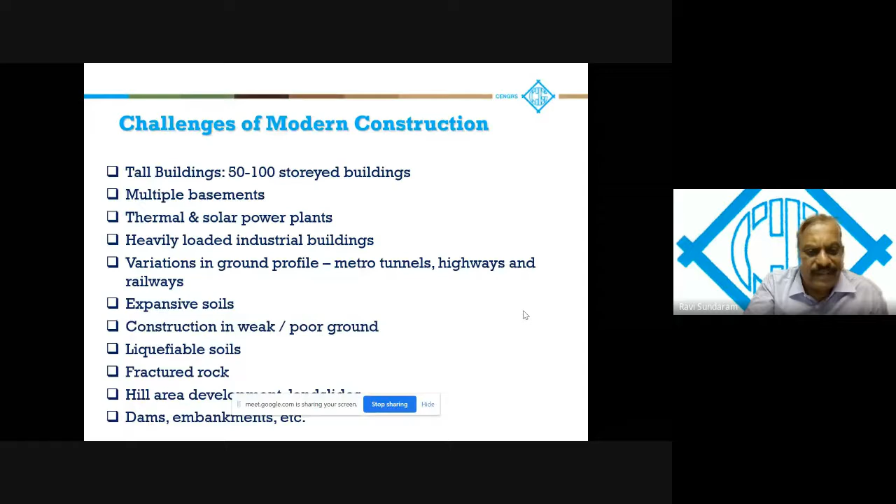The challenges of modern construction include tall buildings, 50 to 100-story buildings, multiple basements, power plants, heavily loaded industrial buildings, variations in ground profile, particularly metros, highways, and railways. When the ground profile is different and the stratigraphy changes along the alignment, the design has to keep changing according to that. Then expansive soils, construction in weak and poor ground, liquefiable soils, fractured rock, hill area development, dams, embankments. The list goes on here also.

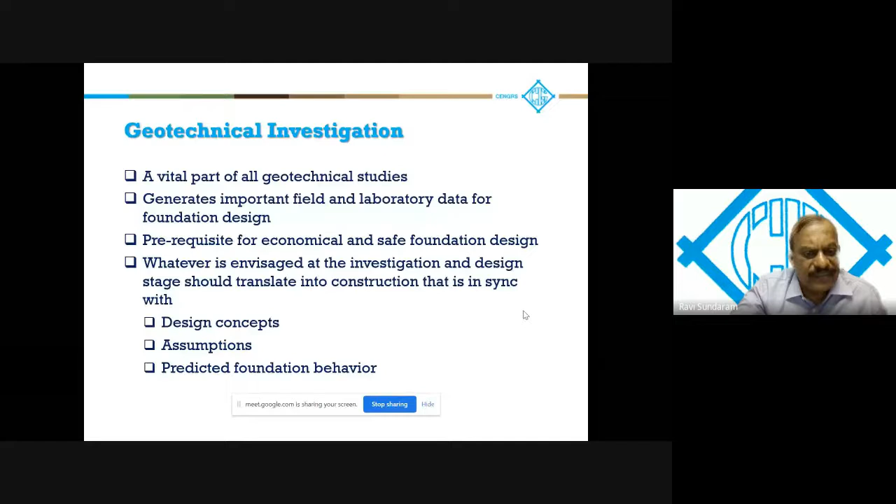So geotechnical investigation, of course, is a vital part of all geotechnical studies. It generates important field and laboratory data for foundation design. It's a prerequisite for economical and safe foundation design. Whatever is envisaged at the investigation stage and the design stage has to translate into construction that is in sync with the design concepts, the assumptions, and the predicted foundation behavior.

Engineers have to come up with solutions for complex problems within a minimum time. So the fast track projects, there is a real challenge nowadays. You have to respond quickly to keep pace with the demands of the fast track projects. Design parameters have to be more realistic. With conventional approaches, it's not just enough to be conservative. You have to go for innovation, safety, and economy. These have to go hand in hand.

So therefore, research and development should address non-quantifiable factors and beyond the textbook situations. The field experience of the engineer becomes most important. You have to understand the assumptions and the limitations of theoretical analysis and computer programs based on theoretical concepts. Computer programs, softwares are being used quite a lot, but the limitations and assumptions have to be clearly understood. The engineering solution which you develop has to be reliable, economic, practical, and amenable to speedy construction. All this within the minimum period. The performance of the structure has to be as was envisaged.

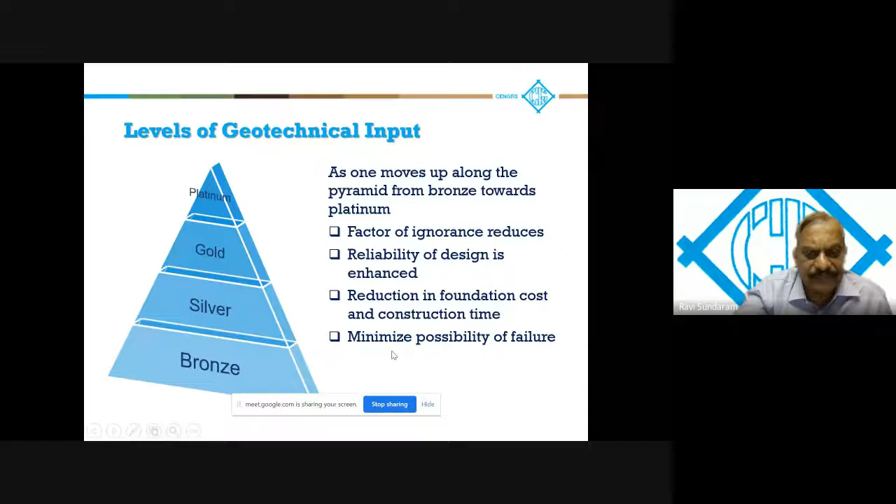So this is called the geotechnical pyramid, geotechnical input pyramid. So as you move up along this pyramid from bronze towards platinum, your factor of ignorance reduces, the reliability of the design is enhanced, there's a reduction in foundation cost and construction time, and you minimize the possibility of failure. So let us look at these bronze, silver, gold, and platinum levels of investigation.

A bronze investigation would have probably shallow boreholes, very limited testing, whereas as you move towards the silver, you have deep boreholes to beyond the pile tip. You conduct SPTs and limited laboratory tests. At the gold level, you have more boreholes, more in situ tests like pressure meter maybe, or maybe static cone penetration tests, lab tests for strength and consolidation, etc.

A platinum level would be a more comprehensive investigation with substantial in situ tests in addition to the boreholes. And maybe if piles are required, you could go for static and dynamic pile load tests. The geotechnical engineer in a bronze level would have limited experience, a non-expert, whereas at a platinum level you have an experienced expert. Similarly, design parameters in a bronze level are primarily guessed, whereas in a platinum level they are site-specific.

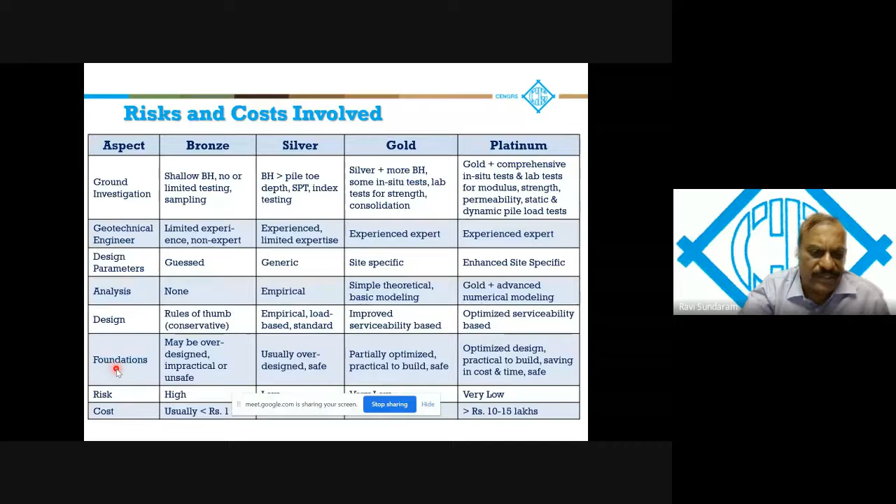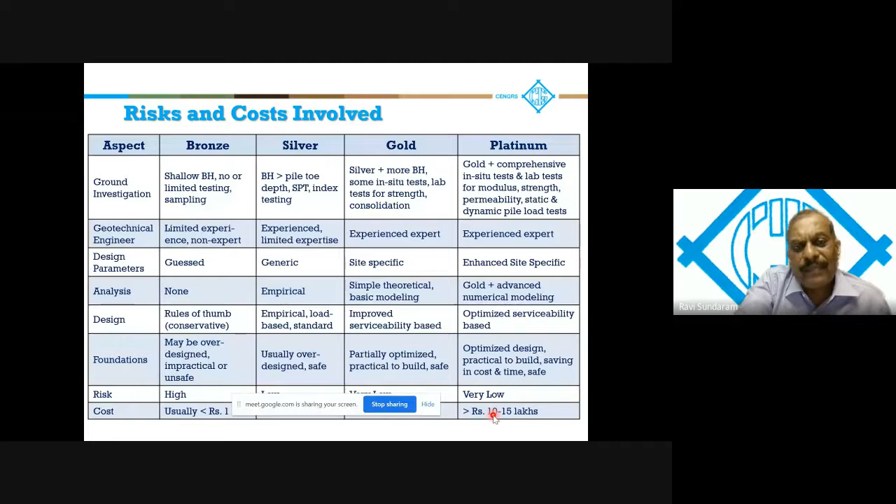The analysis, design, as you move from bronze to platinum, you have an optimized design. The foundations may be over-designed or unsafe or even impractical in a bronze level, whereas in a platinum level, it's an optimized design, practical to build. There is substantial savings in cost and time, and the risks are low in a platinum investigation. Obviously, the cost is much more, but you should always remember that for the amount spent in the investigation, you save much more in the foundation cost.

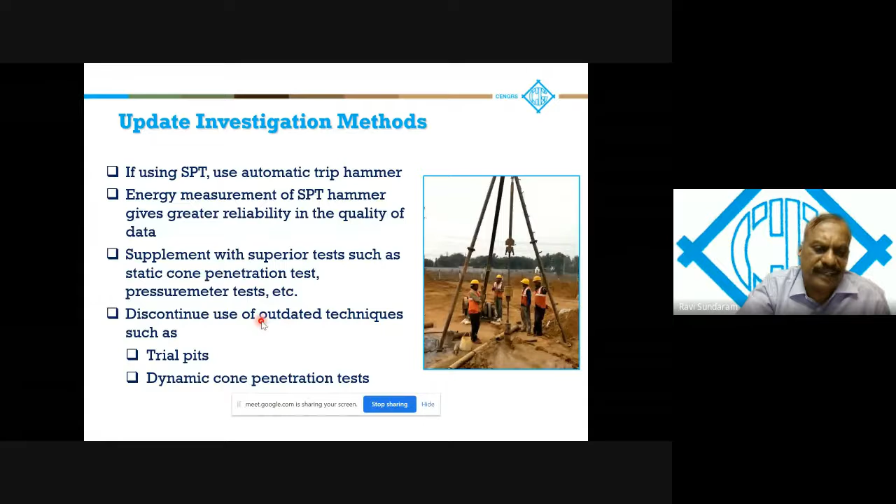So we must move towards gold and platinum levels, avoid bronze level investigations. The investigation should be tailor-made for the project site as per the site requirements. So involvement of the geotechnical consultant should continue right up to the construction stage. So the investigation methods need to be updated. If you are using SPT, you go for an automatic trip hammer. Energy measurement in the SPT hammer gives greater reliability in the data and the quality of the SPT. So you can see the automatic trip hammer here. You have to supplement it with superior tests like static cone penetration tests, pressure meter tests, etc. And discontinue outdated techniques such as trial pits, dynamic cone penetration tests, etc.

Use advanced testing methods. Upgrade to cone penetration test. This would be the static cone penetration test with or without pore water pressure measurement. Pressure meter test, dilatometers, vane shear test, seismic methods, geophysical testing, remote sensing, advanced sampling and laboratory testing methods. So there are various techniques available, but of course we shall be limiting to a few of them only here.

The most important thing is to use field instrumentation data for important structures to update the design parameters. Observational method of design based on field observations and instrumentation. If you can implement this, you can do your design very economically. Use advanced analysis methods; softwares are available for analysis. And modern testing technologies are essential for improving the state of art, the state of practice of geotechnical engineering. So I'd like to differentiate between the state of art and state of practice. In the state of practice, it's what you actually do there.

So static cone penetration test and pressure meter test can justify use of higher bearing capacity for foundations and economize, so as to assess the need for ground improvement. SPT energy measurement can enhance the quality of the data. In some cases, need for pile foundation or ground improvement may be eliminated. Geophysical tests can confirm continuity of the strata, identify anomalous zones if any. Primary and shear wave velocities from seismic tests can be used to assess the shear modulus and Young's modulus. Static cone penetration tests and seismic tests can provide useful data for liquefaction analysis during earthquakes.

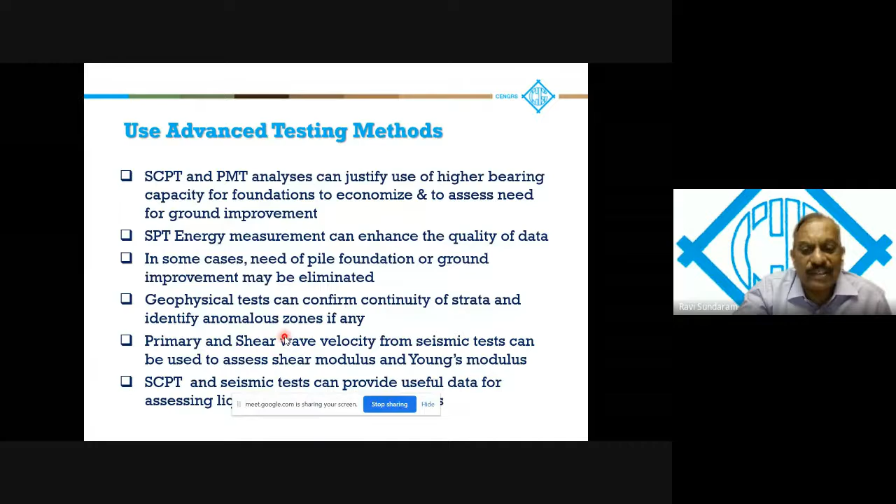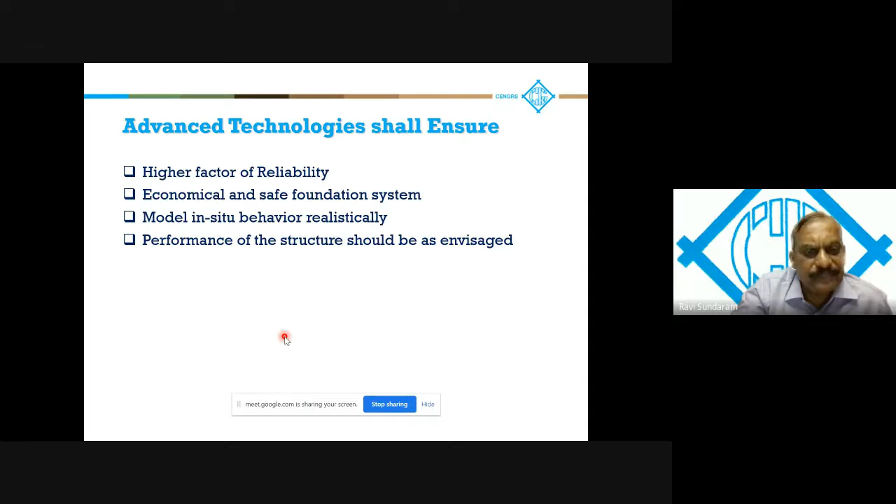So advanced technologies will assure higher factor of reliability as against factor of safety. Economical and safe foundation design. It will model the foundation behavior realistically so that the performance of the structure is as envisaged at the design stage. So thus you can add value to geotechnical exploration and enhance the quality of design.

So tests covered in this webinar series: cone penetration test using mechanical cone as well as using electric cone with pore water pressure measurement, pressure meter test, and SPT energy measurement. Geophysical tests include electrical resistivity test, cross-hole seismic test, seismic refraction test, and spectral analysis of surface waves, that is, SASW test.

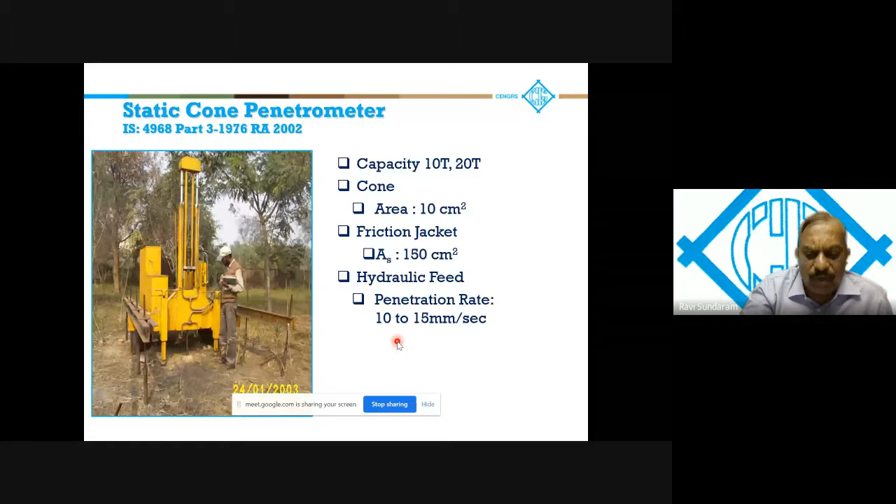So just an introduction to the static cone penetration test, the mechanical cone as well as the electric cone with pore water pressure measurement. The conventional cone penetrometer, which is used in the country, is the mechanical cone system. 10 ton and 20 ton systems are available. The cone usually has a cross-sectional area of 10 square centimeter and a friction jacket of 150 square centimeter. It has a hydraulic feed and the penetration rate is about 10 to 15 mm per second. So this is the mechanical cone. You can have a look at details of the cone. You have the cone here and the friction sleeve here.

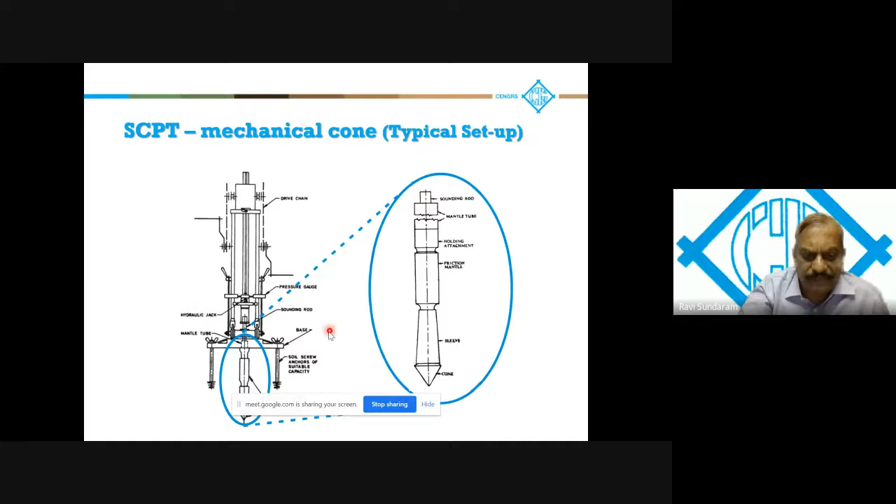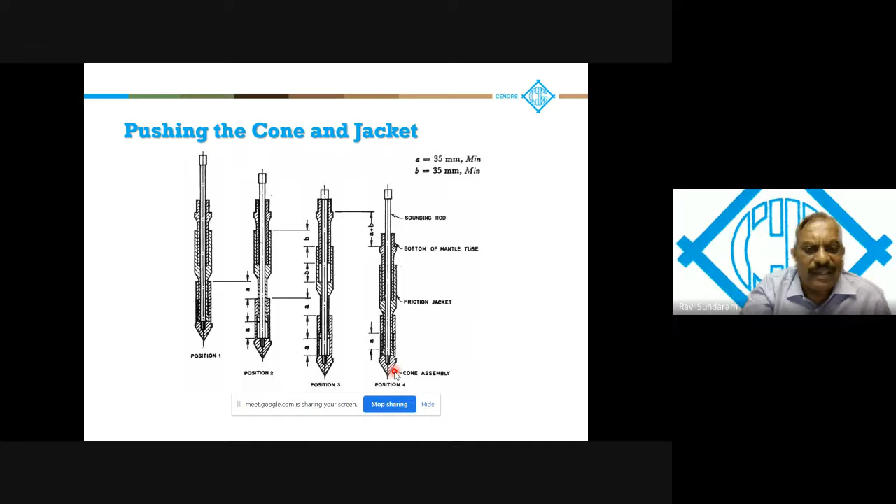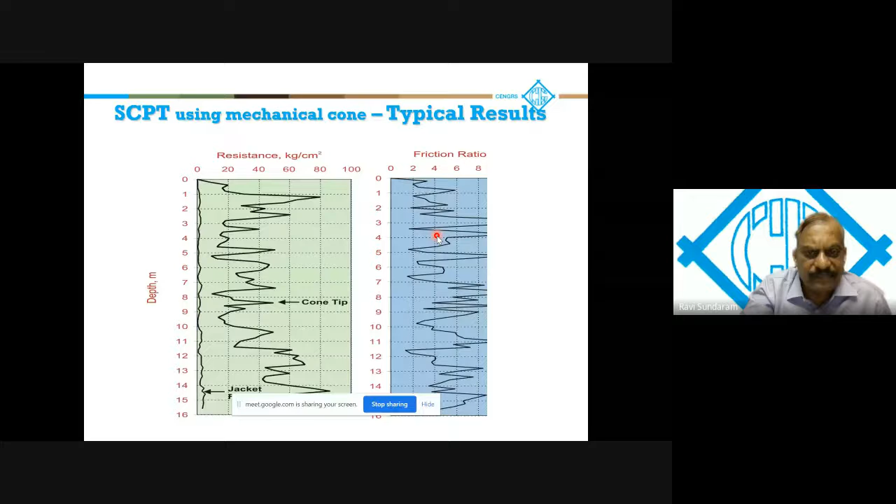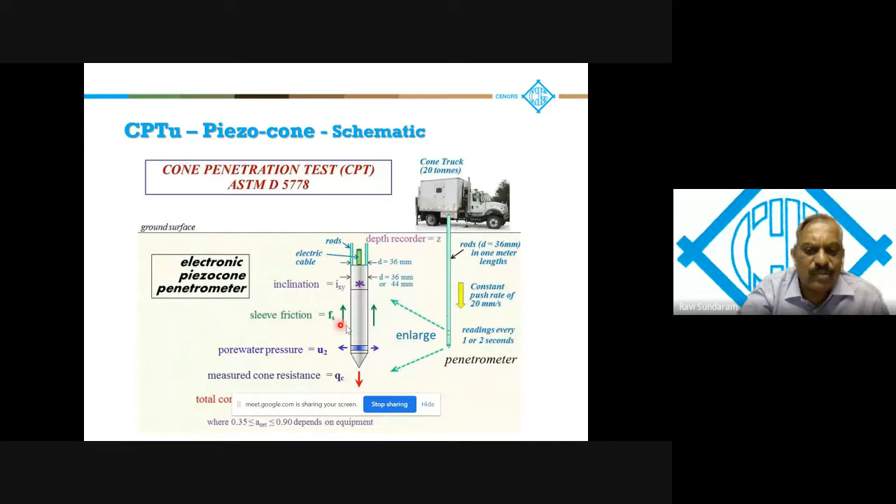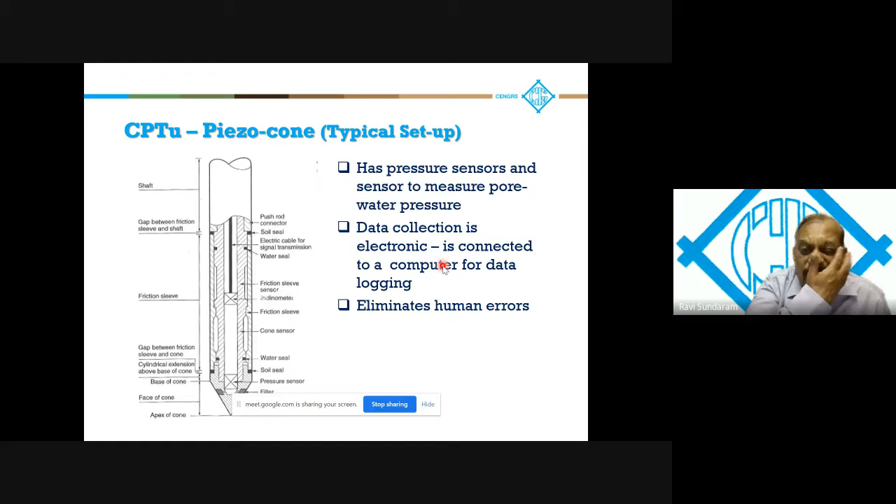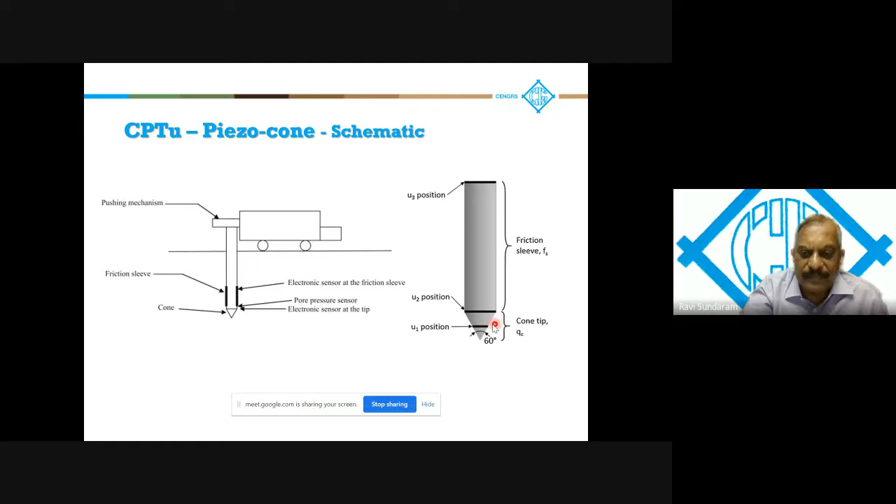So this is a typical piezo cone. You can see here the pressure sensors and the friction sleeve, and at the base of the cone, you have the sensor for the pore water pressure. So the data is collected electronically, connected to a computer. It eliminates human errors. So this is the schematic of the piezo cone. Usually only the U2 is used, although you could have a sensor at this position also.

Cones with a cross-sectional area of 10 square centimeters and 15 square centimeters are both popular. The 15 square centimeter is getting more popular nowadays. The porous element for the pore pressure measurement may be just above the cone or within the cone, as I told you. There is another small variation called the seismic cone with a sensor to measure the shear wave velocity. So that is also being used internationally now.

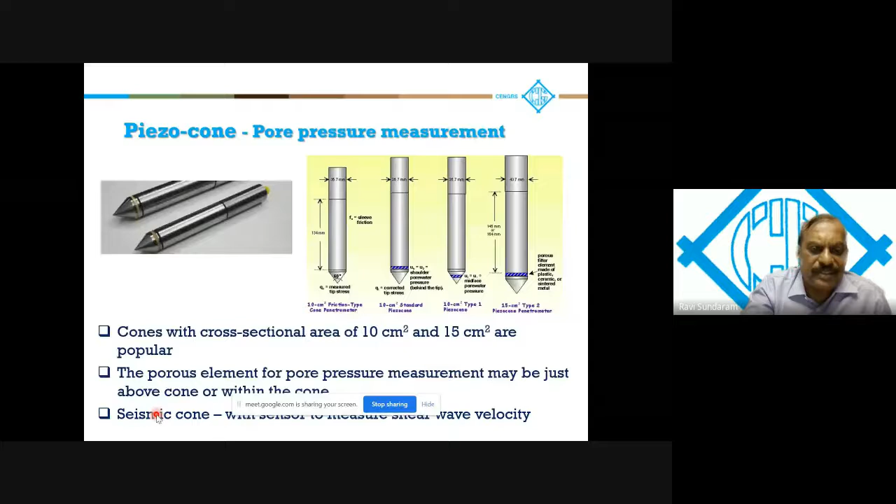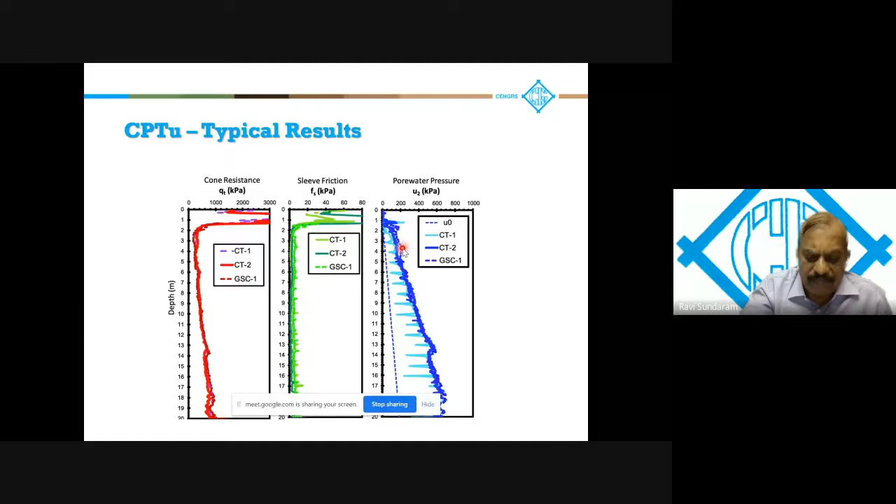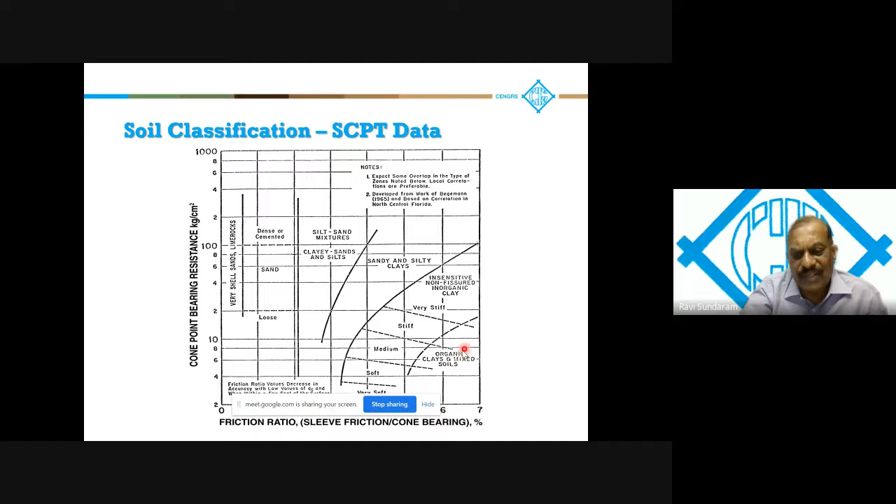Typical results of the cone penetration test: you have the cone resistance, the sleeve friction, and the pore water pressure being measured. So soil classification based on the CPT data, you have the cone tip resistance versus the friction ratio. So the low friction ratios indicate sand, and the higher indicates the clay content. And of course, very high friction ratios would mean it could be organic material.

This is the interpretation of the CPTU data with the cone with pore water pressure measurements. So there you measure u, compute a pore pressure parameter Bq, and this is related to the cone tip resistance, and you can see these different zones. This classification is done, and similarly with the friction ratio.

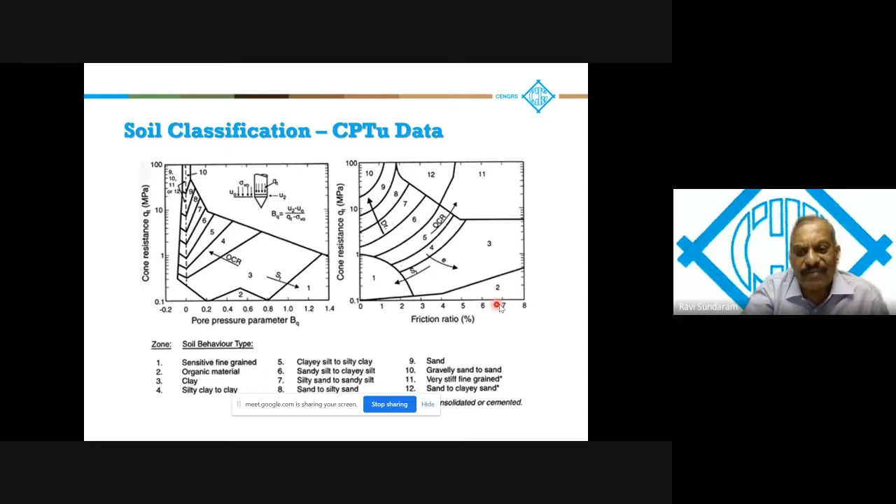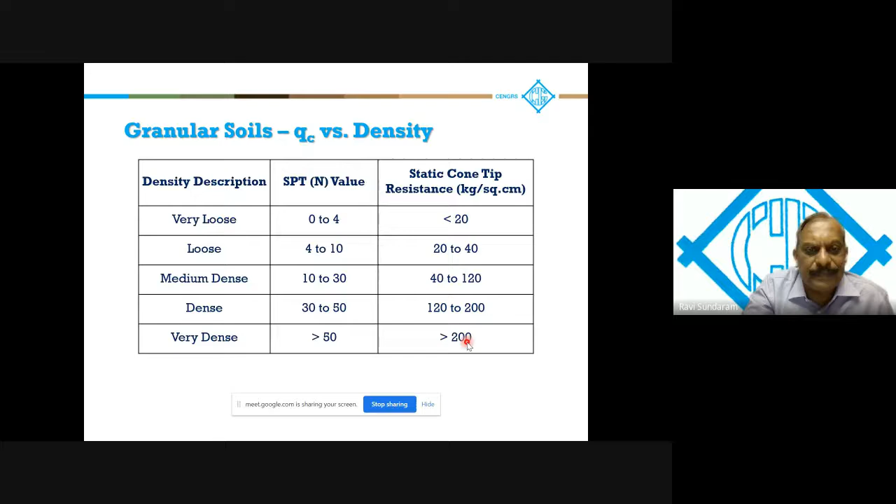Correlations are available for cone tip resistance and SPT values versus density. So right from very loose, with a cone tip resistance of less than 20 kg per square centimeter, to very dense, where you have very high values of cone tip resistance. These correlations are available. And also you can correlate the E values with the qc.

The advantages here are that you get a continuous profile of penetration resistance versus depth, and since it is hydraulically pushed, it eliminates the human errors, and borehole cleaning is not required. And if you were to use CPTU, with the pore water pressure measurements, the advantage is that you get enhanced quality of data and elimination of error due to erroneous interpretation due to friction between the inner and outer rods. All these possible errors are eliminated. It's a simple and reliable electrical measurement with easy recording.

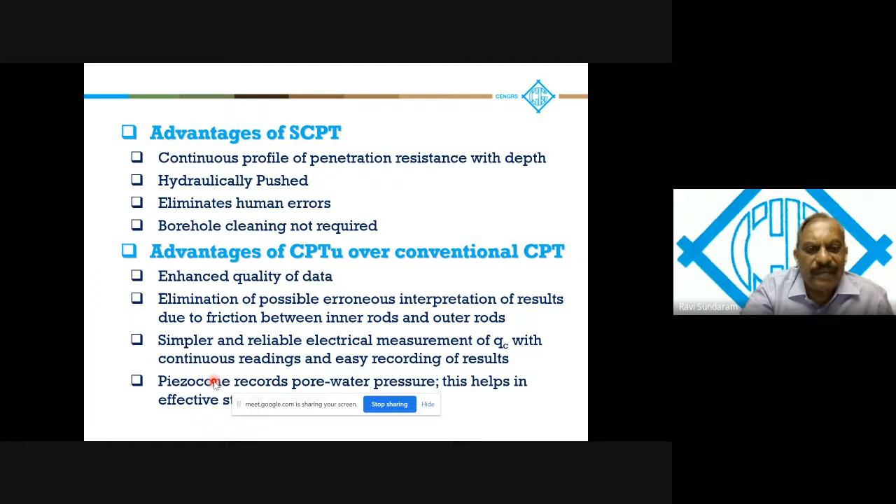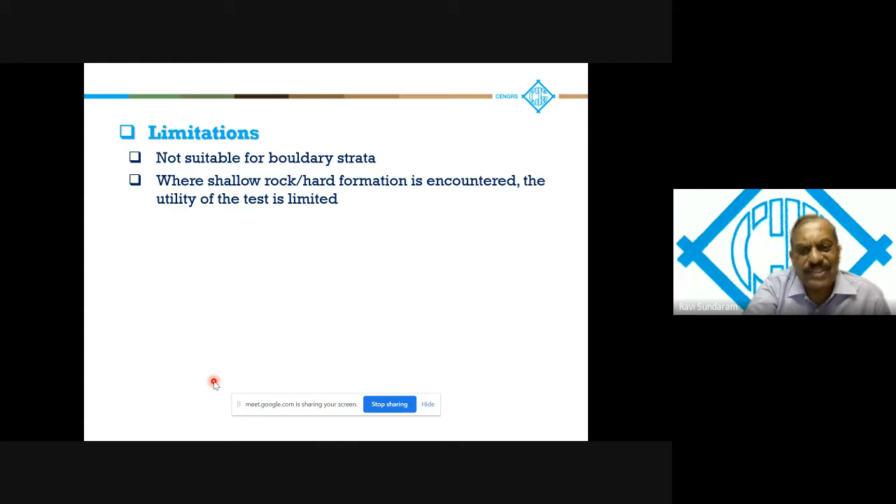The pore water pressure effects are very helpful in the foundation design, in the assessment of what kind of behavior it is going to have. But of course, it has limitations. It's not suitable where boulders are met, or if you are having shallow rock, the utility is limited. I move on to the pressuremeter test.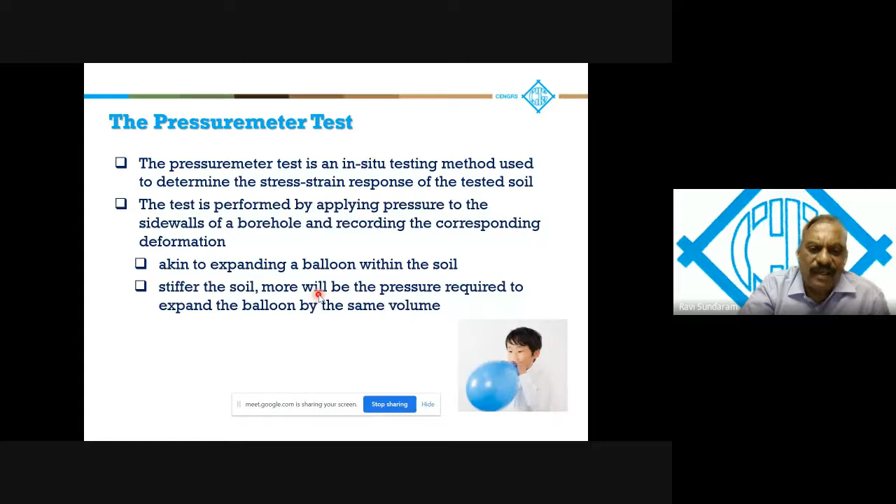The pressuremeter test is an in situ test to determine the stress-strain response of the soil. It is performed by applying a pressure to the side walls of the borehole and recording the corresponding deformation. It is akin to expanding a balloon within the soil. The stiffer the soil, the more pressure will be required to expand the balloon by the same volume.

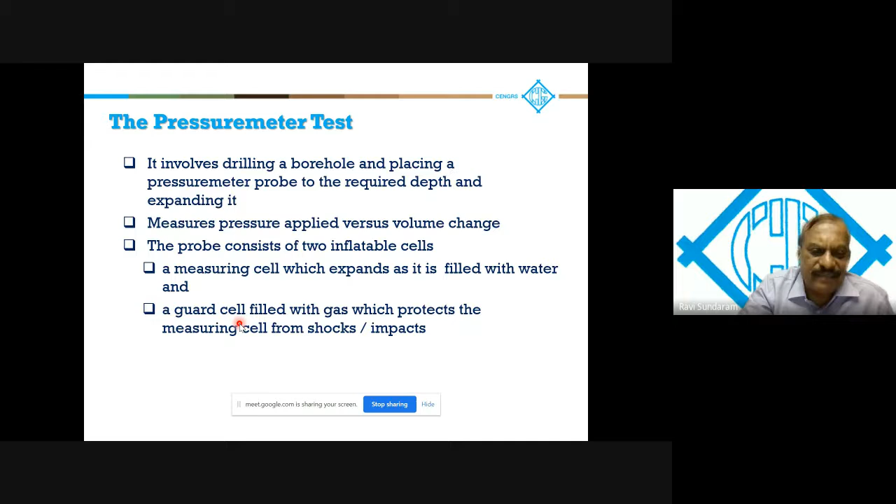So it involves drilling a borehole, placing a pressuremeter probe at the required depth, and then expanding it. You measure pressure versus volume change. So the probe consists of two inflatable cells, a measuring cell which expands as it is filled with water, and a guard cell filled with gas. It protects the measuring cell from shocks or impacts.

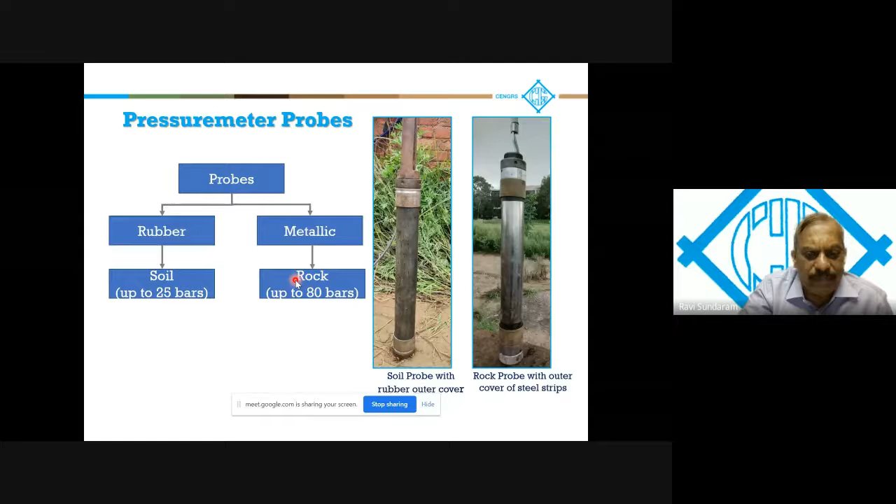So these are the probes. You have a rubber probe for pressures up to 25 bars, and a probe with a metallic outer cover for pressures up to 80 bars. Units up to 200 bars are also available in the market. So it's a typical pressuremeter control panel, and you can see the probe here being expanded.

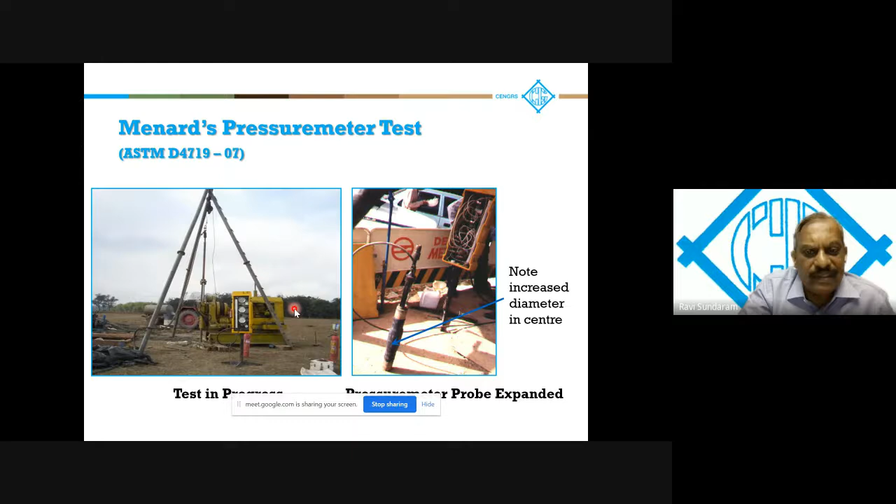You can see the center is having a larger diameter because it has been expanded. So details will be discussed in the presentation 2 weeks from now. Typical results. So what you would be plotting is pressure versus volume change. First you would expand it in air to check what pressure is required to expand in air, and then you expand it in the soil, and the difference between the two gives me the pressure required to expand in the soil.

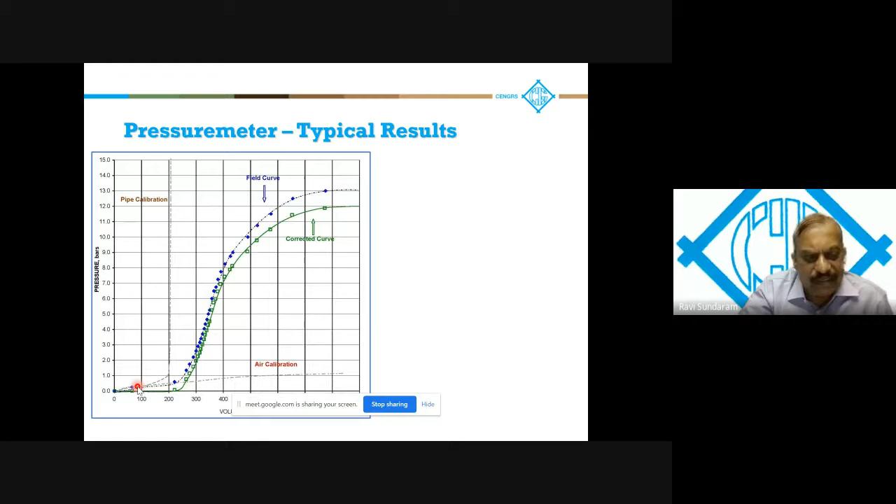It is also corrected for the expansion of the hoses by expanding it on a stiff pipe. Typical results. So what you would be measuring, this is called the limit pressure, the maximum pressure that you can apply, and the deformation modulus is a function of the slope of the straight line portion of the graph. So you could plot this versus depth.

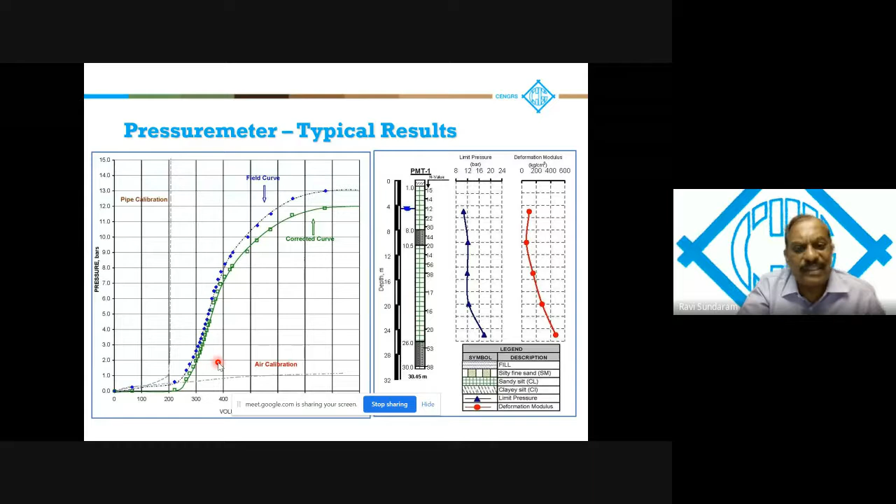The in situ stress strain behavior of the soil can be evaluated, and there's a minimum disturbance to in situ soil conditions. Therefore, the quality is superior. Can be done in both soils, hard strata, and rocks. In weathered rocks, where the core recovery is poor, pressure meter test is the only test which can give you realistic data. Bearing capacity analysis and settlement analysis for foundations and pile capacity analysis using pressure meter data gives you more realistic estimate of the actual soil behavior.

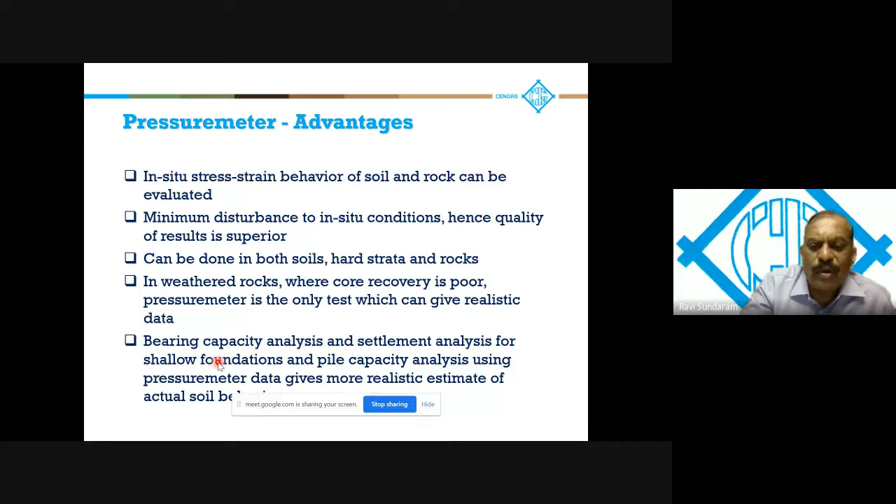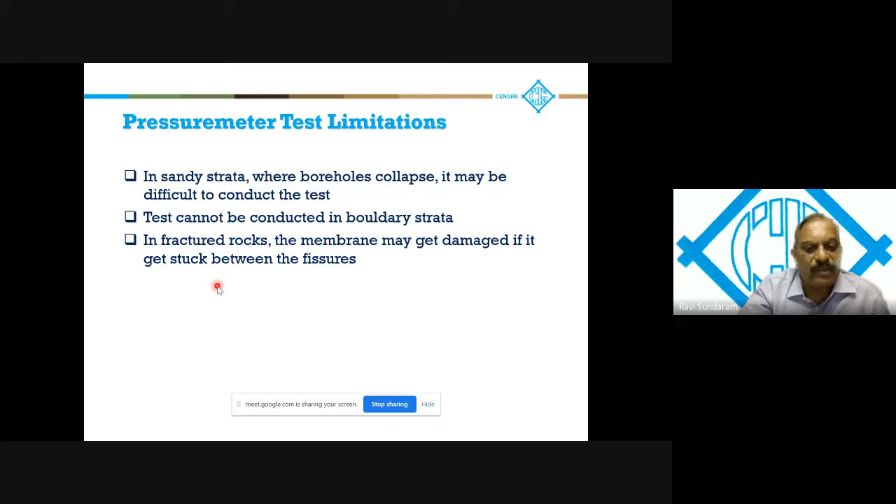Of course, every test has its limitations. In sandy strata where the boreholes collapse, it may be difficult to conduct the test. Again, in boulders, you cannot do it. In fractured rocks, the membrane may get damaged if it gets stuck between the fissures. So these are some of the limitations of this test.

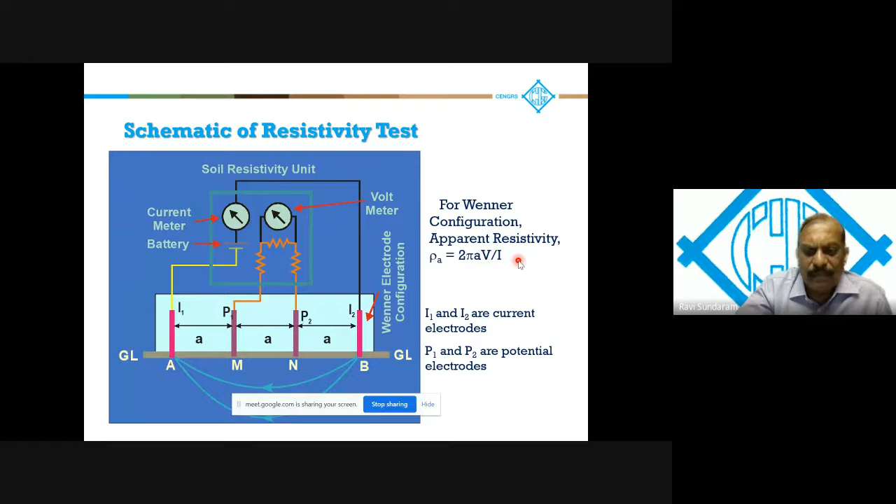It can be used as an investigation tool for fast-track projects, preliminary assessment, as well as detailed assessment. In boulder soil matrix, cost and time savings can be substantial. Number of boreholes can be reduced. Used in conjunction with borehole data, it can be used to estimate the stratigraphy and for confirming the continuity of the strata.

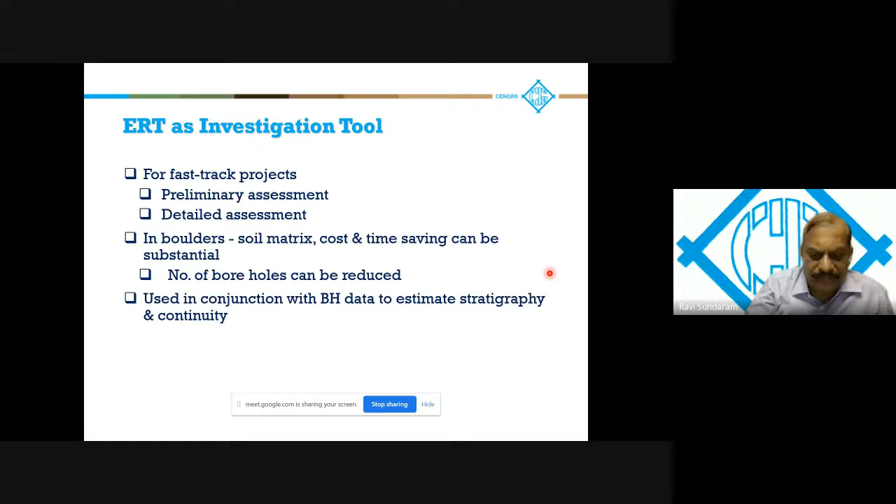Electrical resistivity, of course, is governed by Ohm's law. The resistance to current flow depends on mineralogy, particle arrangement, water content, salinity, etc. Resistivity, of course, is a fundamental property of the soil. It is independent of geometry. We'll discuss this in more detail in the presentation 2 weeks later. The current actually flows through the pore water, which acts as a conductor, as well as the soil and rock grains, which may act as a conductor or an insulator, depending on the nature of the mineral.

I move on to seismic tests for wave velocity. Geophysical tests based on seismic wave velocities. So these are cost-effective and rapid means of obtaining subsurface investigation. The primary wave velocity and shear wave velocity is a parameter that is used for the analysis. The test may be used to measure the physical properties of the ground, to assess the stratigraphy, design of dynamically loaded foundations, and to assess the liquefaction potential.

So the tests covered in this presentation here, I'll just be briefly talking about the cross-hole seismic test, the downhole seismic test, the uphole seismic test, seismic cone penetration test, seismic refraction test, and SASW test. In these tests, the recorded waveforms, the seismic wave velocities, etc., are determined, and from there you determine the various parameters. So start with cross-hole seismic test.

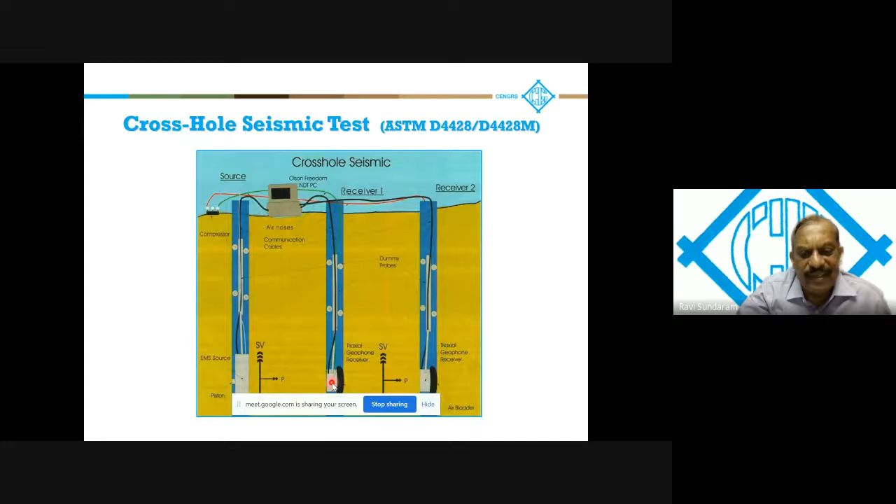So here you have 3 boreholes. This one would act as the source where you create an energy impact, and you have the parallel boreholes normally 3 to 4 meters apart, and here you have geophones at the same level as where the impact is being generated. And what you would do is you would record the time of arrival of the wave at these two locations. So we have 3 boreholes here, and the data acquisition being done.

Here horizontally traveling P and S waves are generated in the borehole at the desired depth. Arrival times are recorded at 2 adjacent boreholes. Usually the test is conducted at every 1.5 meter depth interval. You can use the system to test up to 100-150 meter depth.

Typical results: this is the primary wave, and this is the wave velocity for the primary wave, and this is the velocity of the shear wave. You can see how it is increasing with depth.

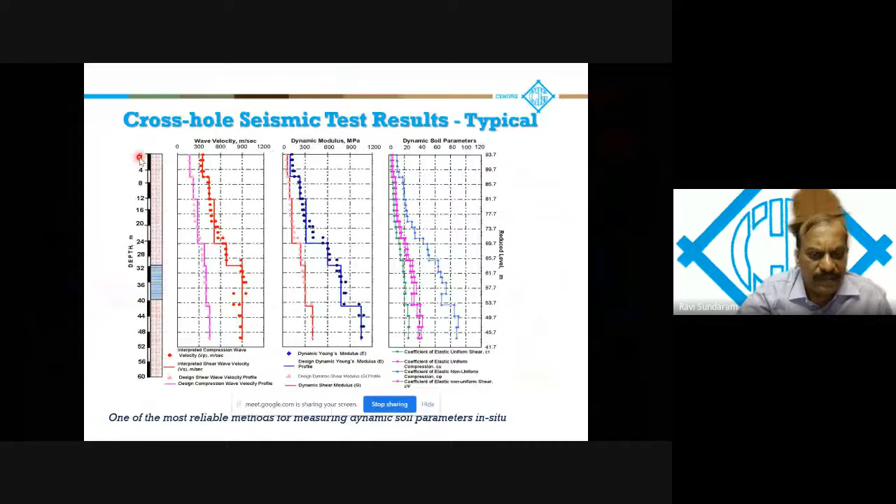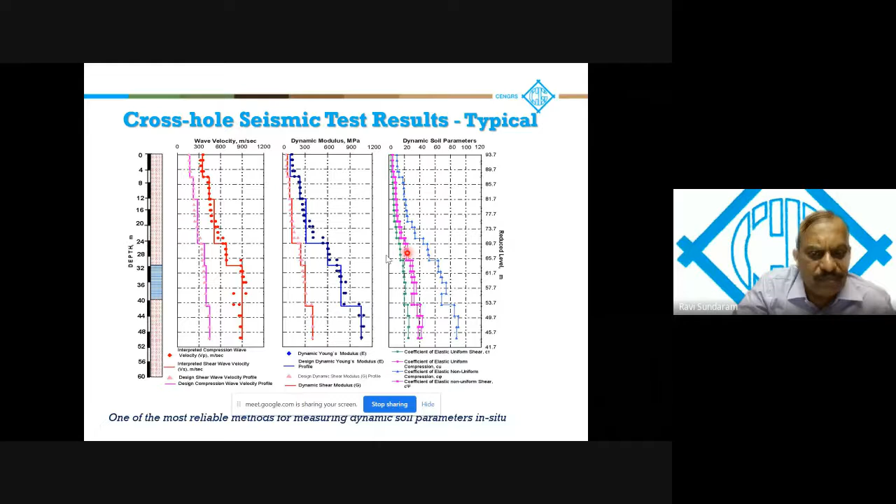So dynamic modulus, including the dynamic Young's modulus and the dynamic shear modulus, can be determined. There are various other parameters like coefficient of elastic uniform shear, coefficient of uniform compression, non-uniform compression, as well as non-uniform shear. All these parameters can be determined. It's one of the most reliable methods of measuring dynamic properties of the soil in situ.

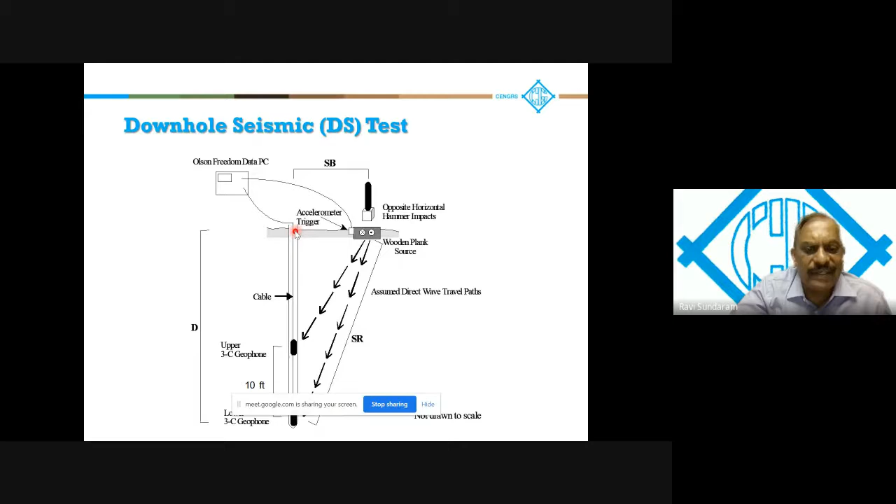The downhole seismic test is a small variation. You need only one borehole, and the impact is created on the ground. Usually you would have two geophones suspended at two different distances, and from the arrival times you can calculate the hypotenuse distance, and then the vertical wave velocity.

The uphole seismic test is a test in which you create the impact down in the borehole, and you have geophones placed along a line. Normally impact is created in the borehole, and you can do the uphole seismic test. This would be similar, slightly different from the downhole.

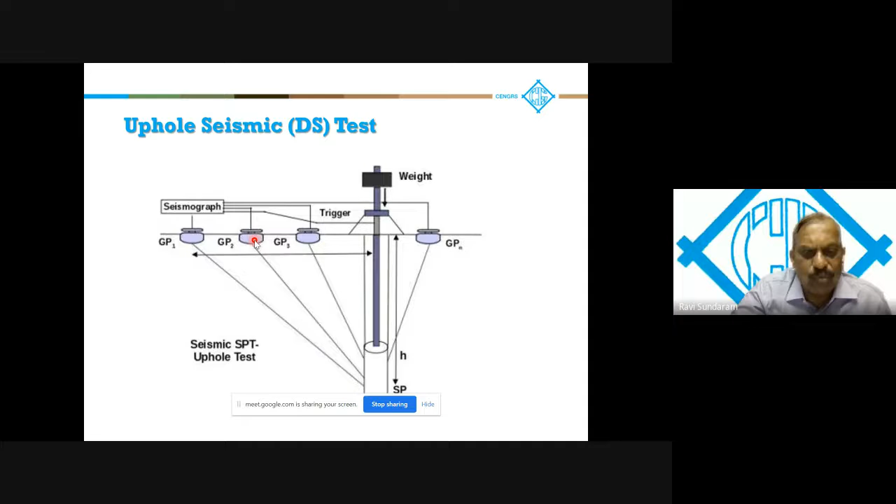The seismic cone penetration test uses the same cone penetration test, but the cone has a sensor by which you can measure the wave velocities. The energy impact is again created at the ground surface, and then you measure the response.

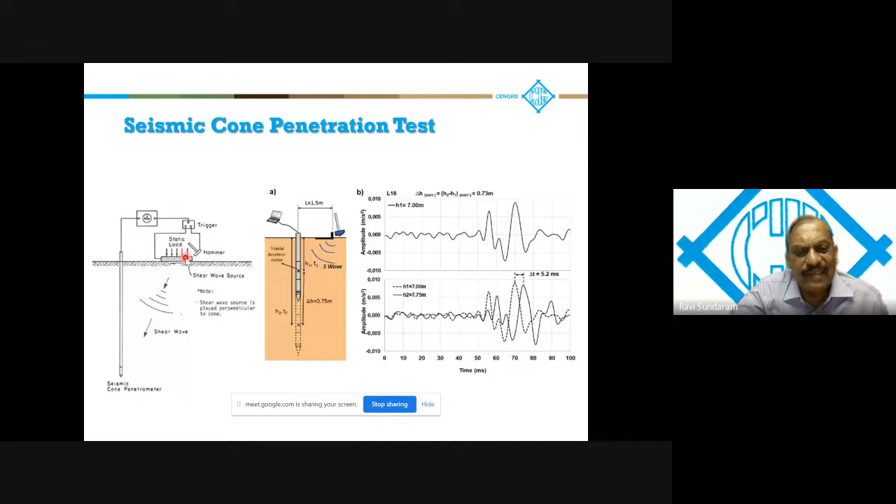To generate the P wave, you strike a plate on the ground with usually a 12-pound hammer. An explosive can also be used if you want to get the energy down to greater depths. To generate the shear wave, a wooden plank coupled with the ground is struck horizontally.

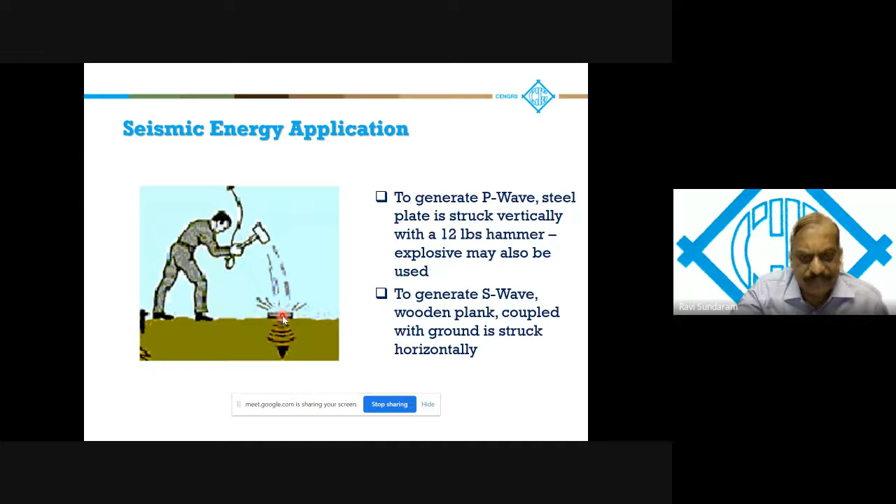The principle is that elastic waves are initiated at the ground surface, and the seismic waves travel along the discontinuities or the interface, and then they are refracted back to the ground level. The arrival time of the seismic energy is determined at a number of points along the line where the geophones are placed, and the travel time data is used to determine the primary and shear waves and the depth of the layers.

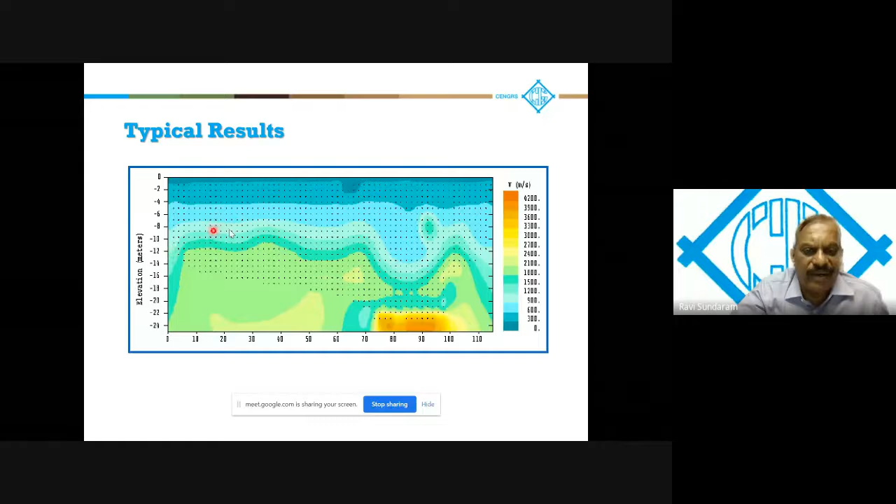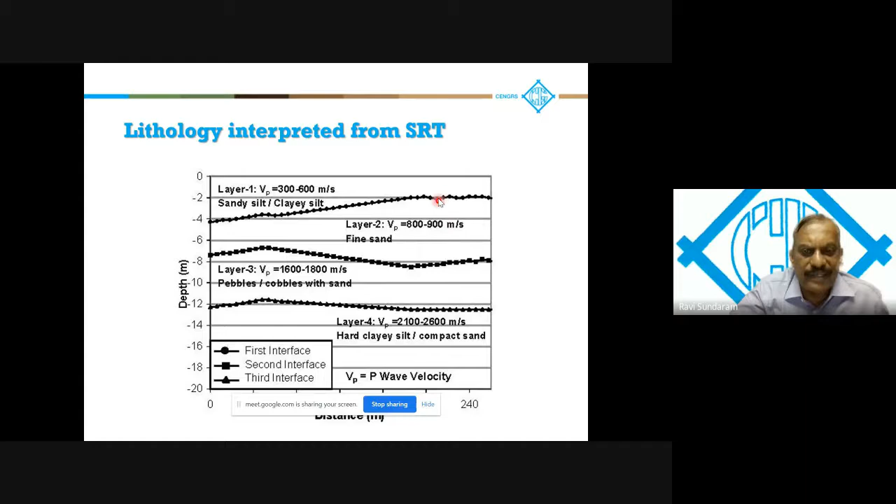Data acquisition being done here. The typical results show the different layers and how they are varying, so you can interpret the lithology from the test. The various layers can be interpreted along the line.

The advantages are that generalized stratigraphy over large areas can be quickly assessed. Identification of anomalous zones, fissured and fractured zones, shear zones, sinkholes - all these you can identify. Data can be used for dynamic analysis, and you don't need that many boreholes. You can do a few boreholes and then identify the trend of the variation of the layers.

Limitations, of course, are there. The softer layer underlying a hard strata cannot be identified. Intermediate thin layers can be missed out. If the bedrock is undulating, interpretation of the layers can be misleading.

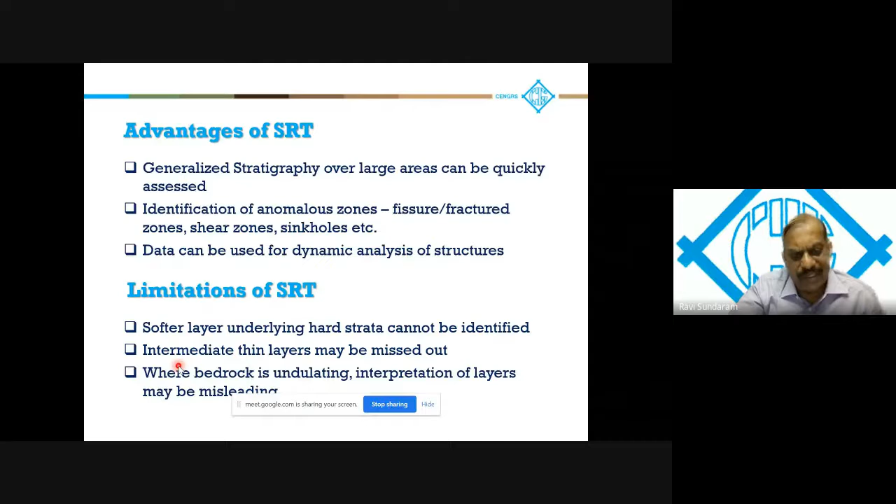Typical interpretation based on the seismic refraction test: you can see here at NTPC Sundernagar, we had identified the various layers and the velocity of the layers. Each of these layers we could interpret from the borehole data, that the deeper one is the saturated rock.

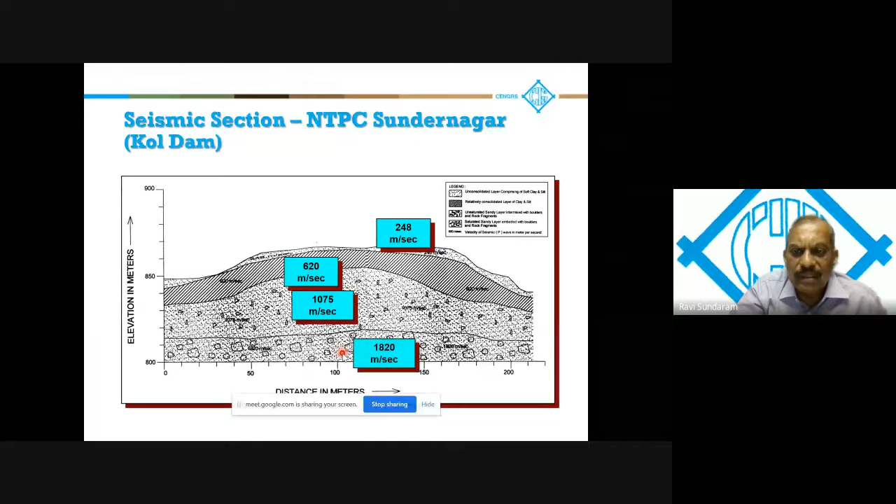I move on to the SASW test. This again is similar to seismic refraction, but the geophones used are slightly different. Again, no boreholes are required here. You have an impact and then an array of geophones.

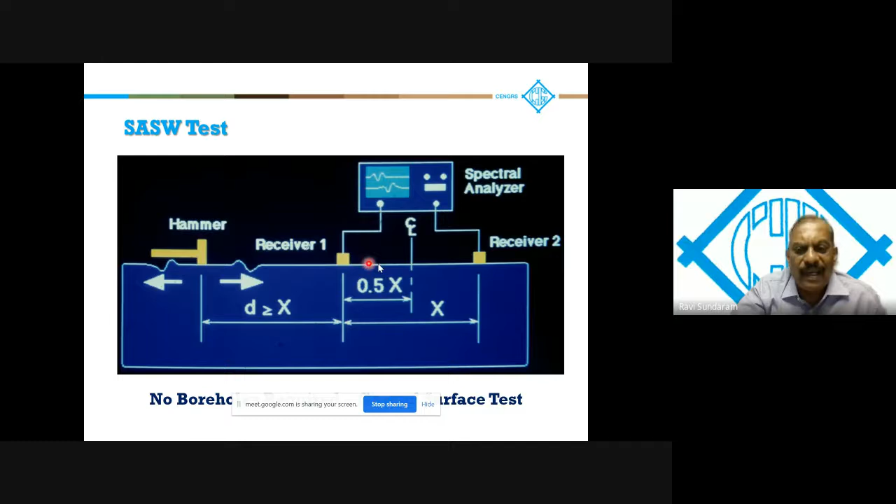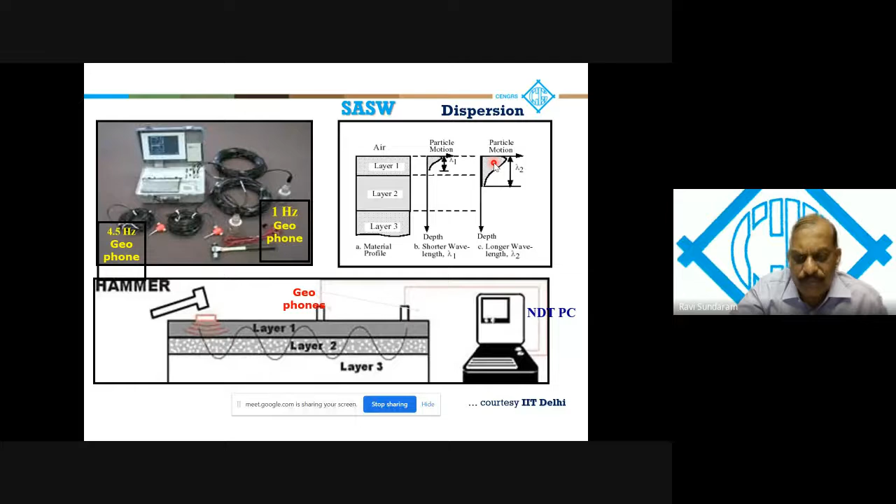So this is the system which is used to determine and analyze SASW. A sledgehammer is again used as a source, and you can see the geophones here.

Now I come to energy measurement for SPT. This is the last section of my presentation here.

All of you are aware of the conventional SPT system where you have a split spoon sampler and you hit it. Normally you have a 75 to 200 mm diameter hole, usually 150 mm diameter. The split spoon sampler is 50 mm diameter.

The hammer weight is 63.5 kg and the height of fall is 750 mm. So you drive it first by 150 mm, and those blows are ignored. Then you drive it by another 30 centimeters, recording the blows every 15 centimeters, and the sum of the last two blows is taken as the SPT value.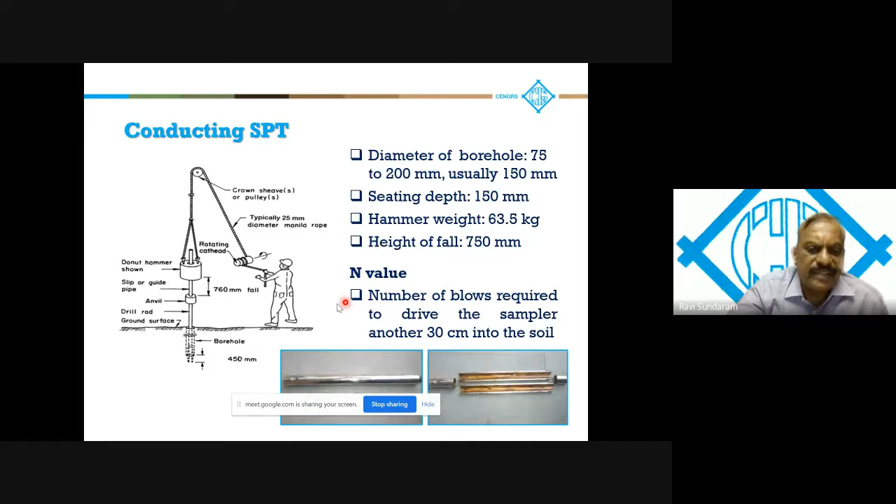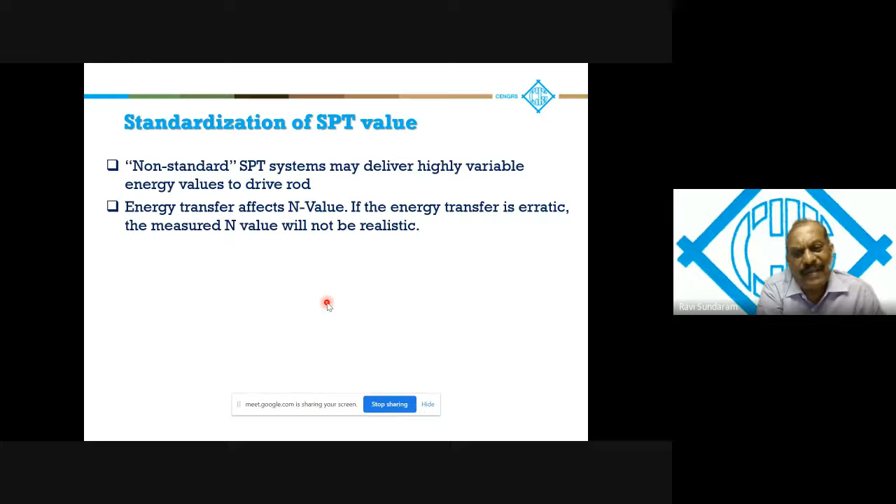Now standardization of the SPT value becomes very critical because non-standard SPT systems may deliver highly variable energy values to the drive rod. The energy transfer affects the N value, so if the energy transfer is erratic, the measured N value will not be realistic.

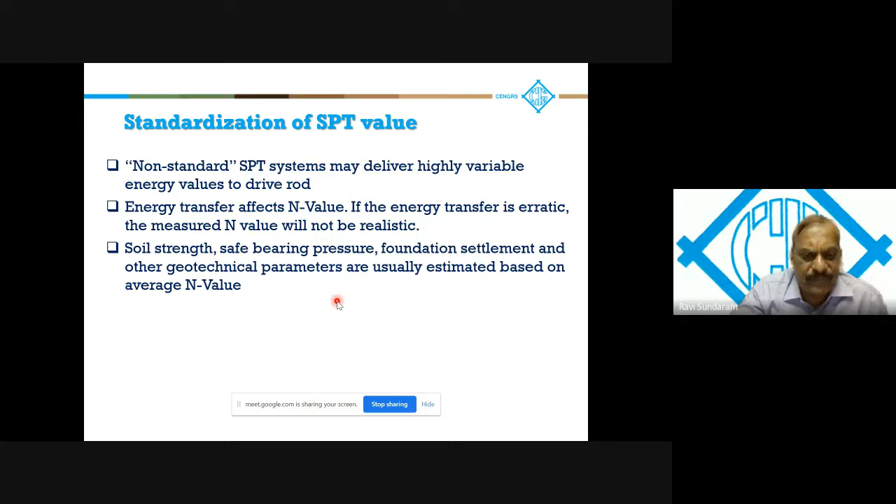The soil strength, safe bearing pressure, foundation settlement, and other geotechnical parameters are usually based on the average N value. So lower energy will result in a higher N value, leading to unsafe predictions, while high energy could result in over-design.

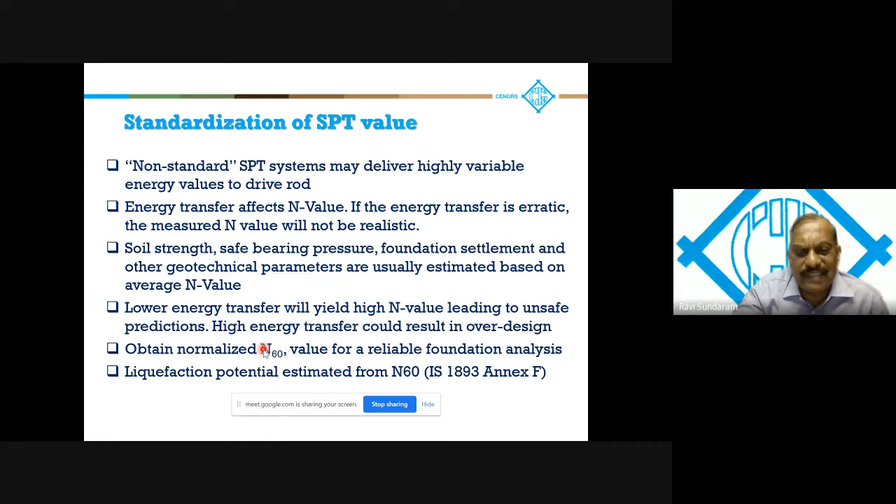So you must obtain a normalized N60, which is 60% efficiency, for reliable foundation analysis. Liquefaction potential also uses N60, which is 60% efficiency. So the SPT analyzer is a very effective way of doing this.

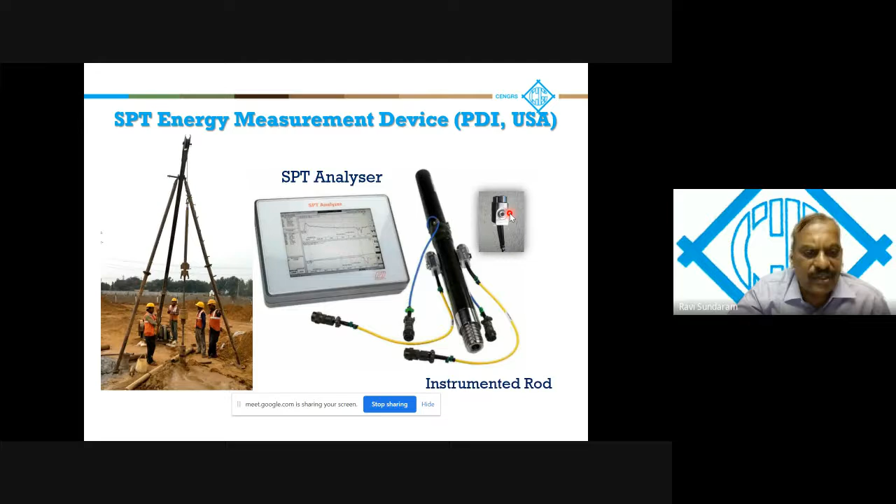Energy calibration will normalize the energy transfer to the SPT sampler and help standardize the test. It will remove the scatter in the values and thus enhance the reliability of the data. Energy calibration should be made for each rig, which will have different types of driving systems and skill of the operator.

It should be standardized to 60% energy transfer so that all the correlations which are used with N can still be valid.

IS 2131 and 1893 shall be similar while addressing these specifications and corrections. The code IS 2131, of course, does not have energy correction, but energy calibration. But the code is under revision, and hopefully this will be introduced in the code very soon.

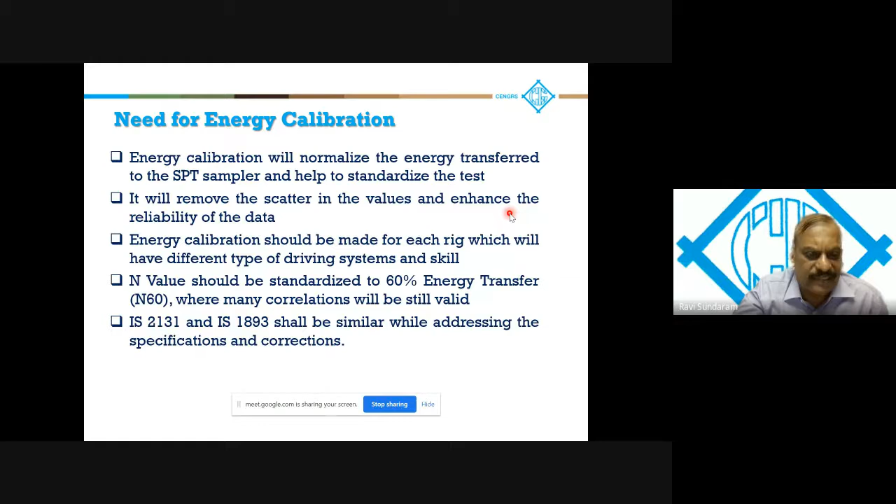ASTM, of course, has energy calibration advised. So with this, I come to the conclusion of this presentation.

In conjunction with boreholes, in situ tests such as pressure meter tests, static cone penetration tests, load tests, etc., as well as geophysical tests, can confirm the continuity of the strata, evaluate the stratigraphy, and determine the relevant parameters. The advanced testing technologies can provide useful data for foundation analysis.

It can economize the foundation design, make the predictions more realistic, so that we can have better control on the foundation behavior. The testing procedure and program should aim on saving time and cost of investigation while improving the reliability of data.

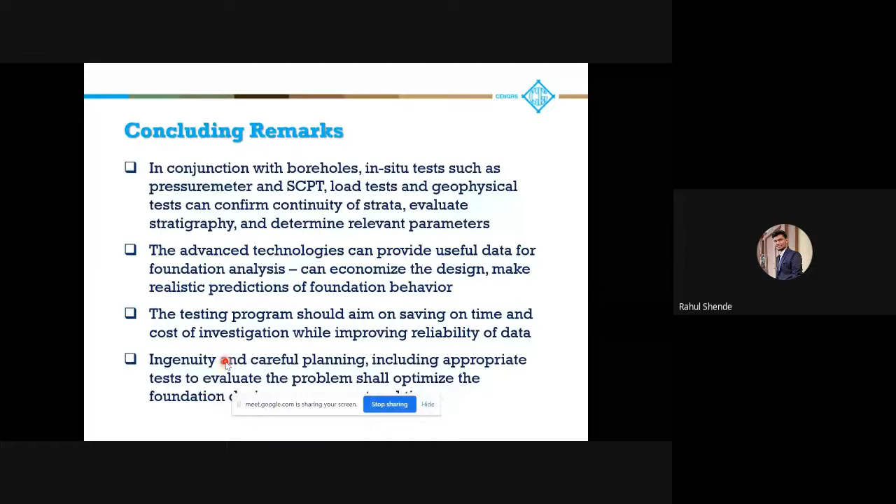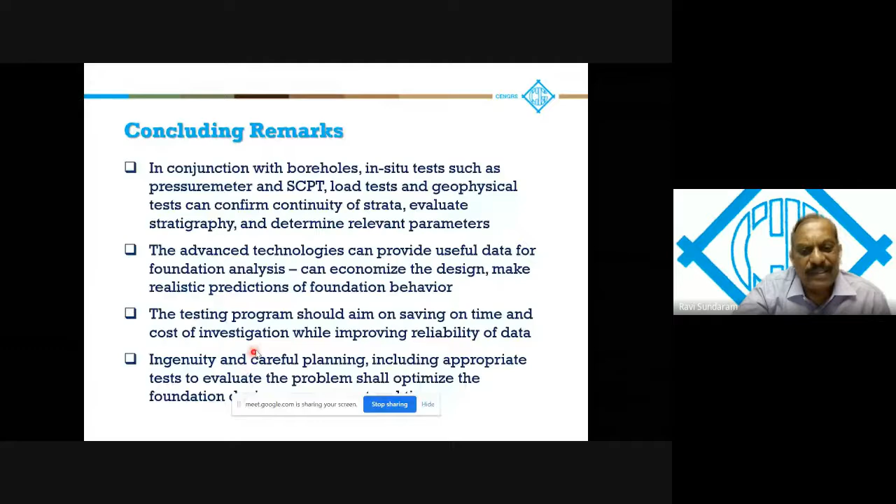Ingenuity and careful planning, including appropriate tests to evaluate the problems, is very much essential so that you can optimize the foundation design. Thank you very much for your kind attention.

I shall be happy to take questions. Thank you.

Thank you, sir. Thank you very much for the kind lecture of yours. It started from the very basics and connected it to the field testing as well. We talked a lot about the advanced testing required in this field. So, with your kind permission, can we go on to the query round?